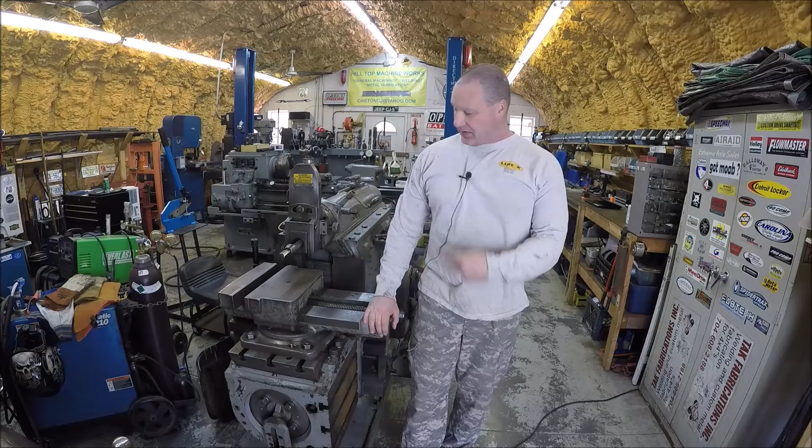Well hey guys, it's Tom here, and I got a new machine for the shop. I think I need to go to that 12-step program and admit that I've got a fetish for the old American iron.

So this was on my wish list, and I finally found one, and I couldn't pass it up. So time to make a video for you guys to enjoy the fruits of my labor. I filmed a short video of picking it up and unloading it and getting it set, so I'll go ahead and splice this in right after I do this intro.

So what you're looking at is a 16-inch G&E industrial shaper. Perfect size. I didn't want something too big, taking up a large section of real estate in the shop, but I also wanted something big enough that it'd have enough ass to actually do some decent work. So that's why I settled on a 16-inch shaper.

The 16 inches designates that the ram will travel 16 inches in stroke. The table should go down far enough so you've got 16 inches between the tool post and your work, and also the table should travel back and forth 16 inches. So basically you could cut a 16 by 16 by 16 cube.

And this is the industrial model. It's about 1,000 pounds heavier than the tool room model. The industrial model also comes with the front table support, if you can see that. If not, I'm going to do the walk around here in a little bit and I'll point that out.

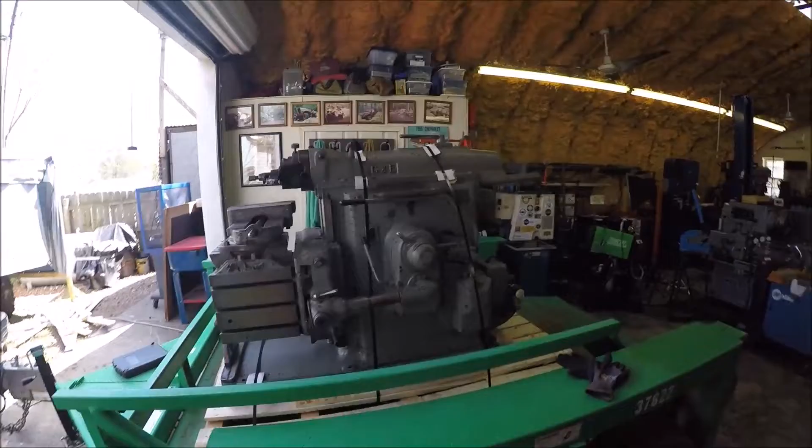Well guys, we got her home all safe and sound. Just got the crate off of her. Just kind of taking a look-see. Hopefully the light's pretty good here.

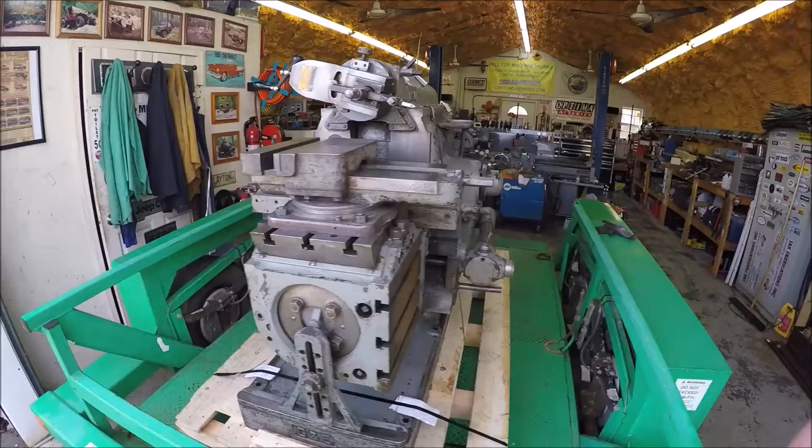But she is a 16-inch G&E Industrial Universal with the rotating table and also the tilting top that I was looking for. Comes with the front support. Of course, we'll do a more thorough look once we get her off there, but I figured I'd give you a quick shot. So there she is.

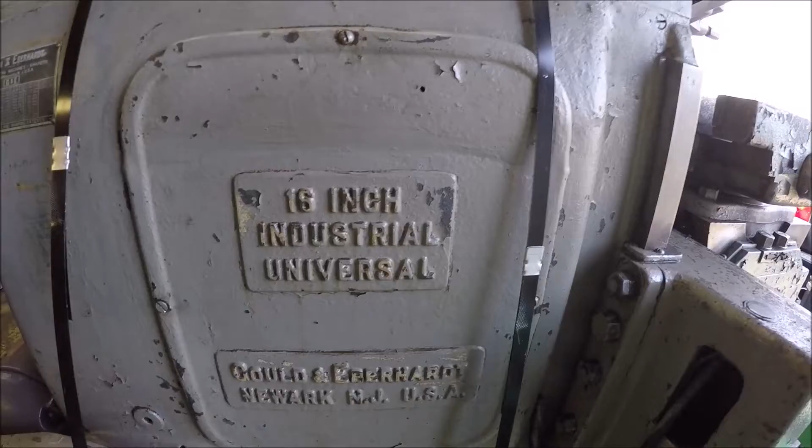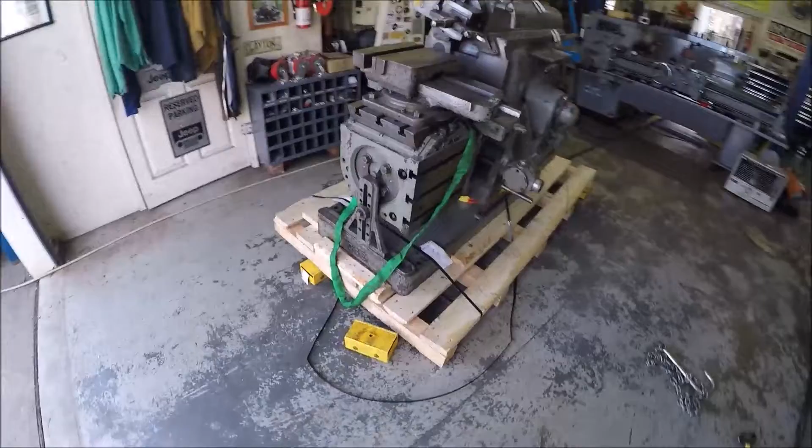So now we gotta muscle her off the trailer. Well, we just got her off the trailer. The skates work perfectly. We had to run a chain all the way back. I've got a 4x6 post in the ground, set up exactly for this, for pulling and winching. So the skates work good. Rolled her off the trailer slow and easy. Lost the skate at the last minute, but she's sitting on the ground, so yay.

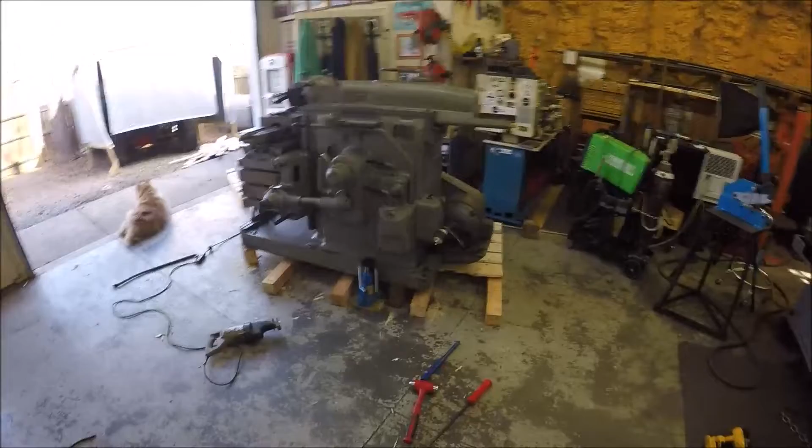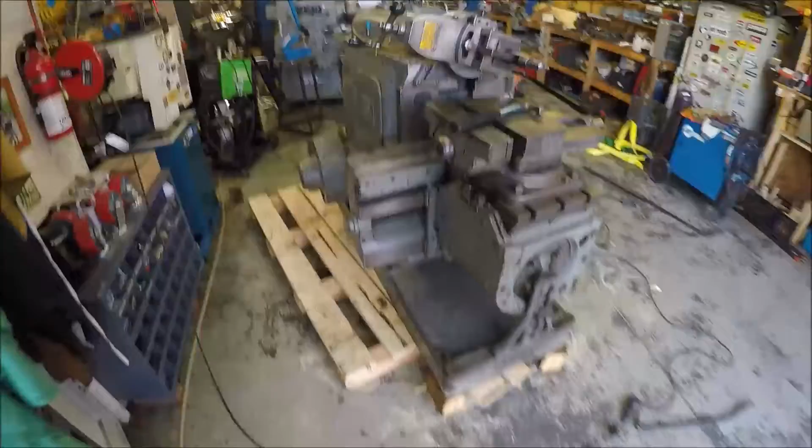Well, give you guys an update here. We are slowly getting the pallet out from under the shaper. As you can see, we're working our way and chunking it out. Slow but surely, being real careful.

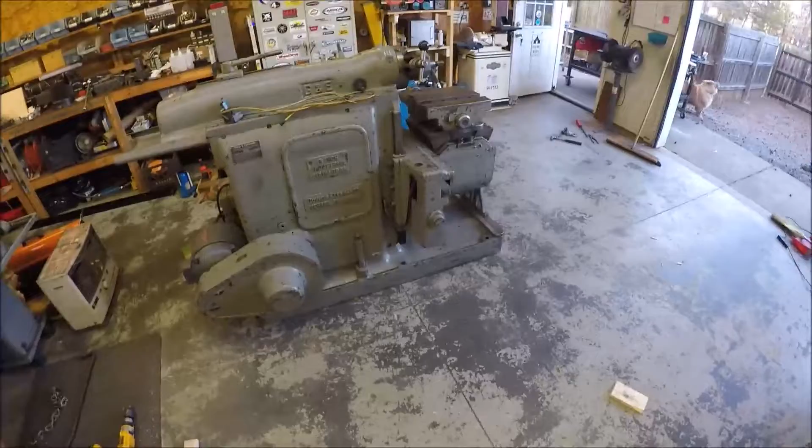Well, there you go guys. After a long battle, we finally got her sitting down on the concrete, and this is the position she's going to live. And I don't know why my dog wants to bark as soon as I do video. But no mishaps, no boo-boos, no Mr. Murphy showing up, so we are pleased.

And just a short walk around. I'll do a complete video on this here coming up once I get it cleaned up and wired and learn the controls and whatnot. There's a little monster making all the noise.

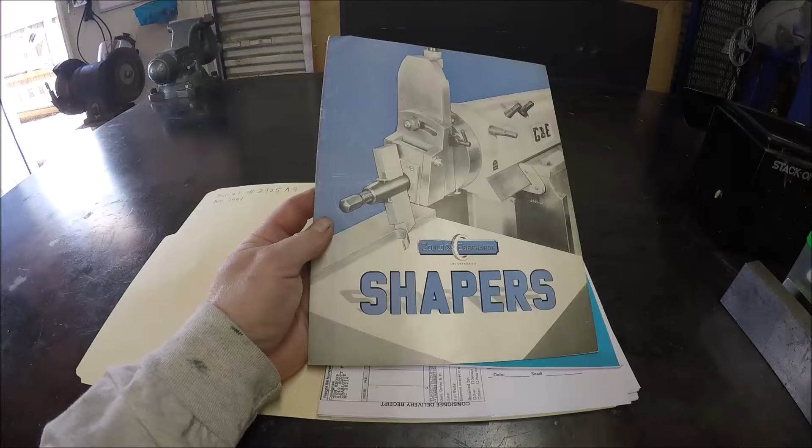I've been on the internet gathering and searching all the info and the manuals and whatnot I could find on G&E Shapers. So I picked up this original pamphlet that G&E put out. Figured we'd go through it real quick. It's kind of cool, it's from the 50s, but it kind of explains some stuff.

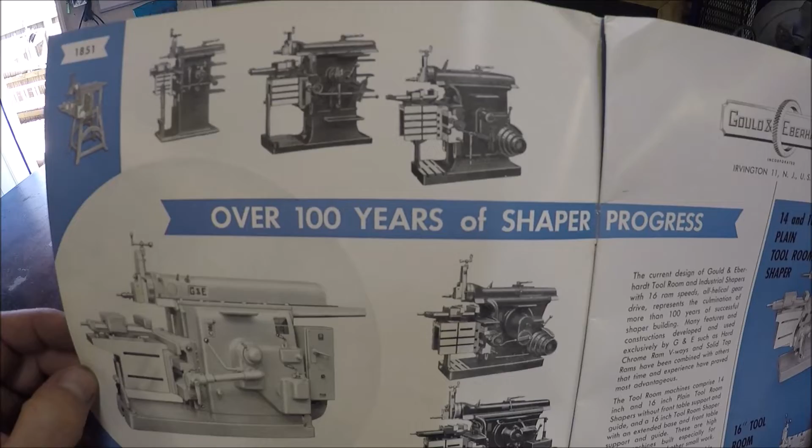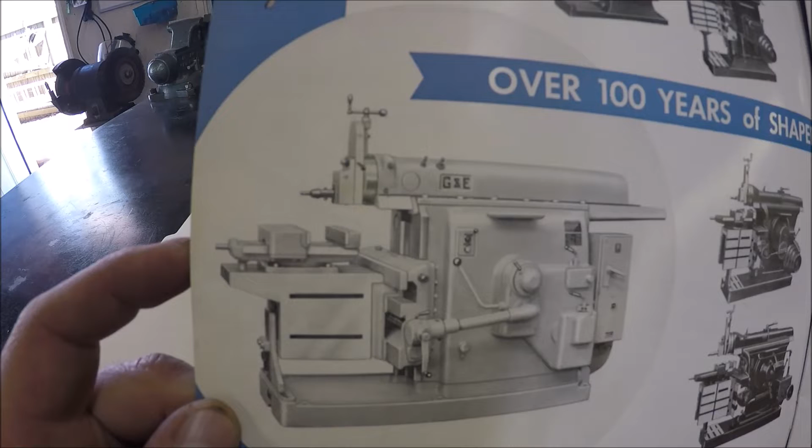And you guys can see how they started back in the day, 1851, and how they progressed to basically that was their latest version that they produced till they went out of business.

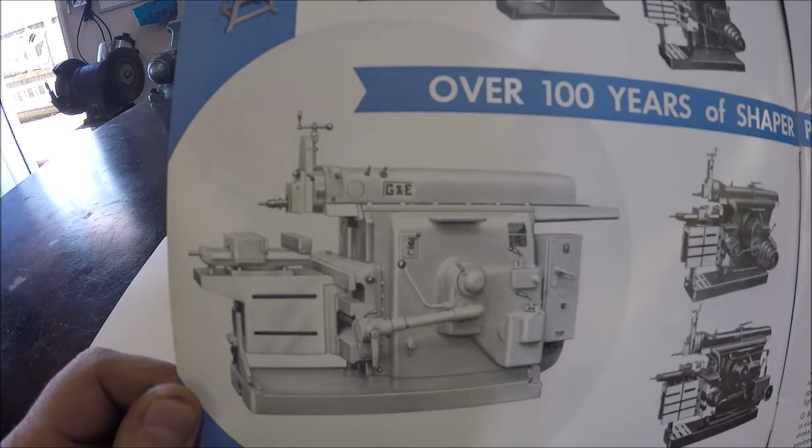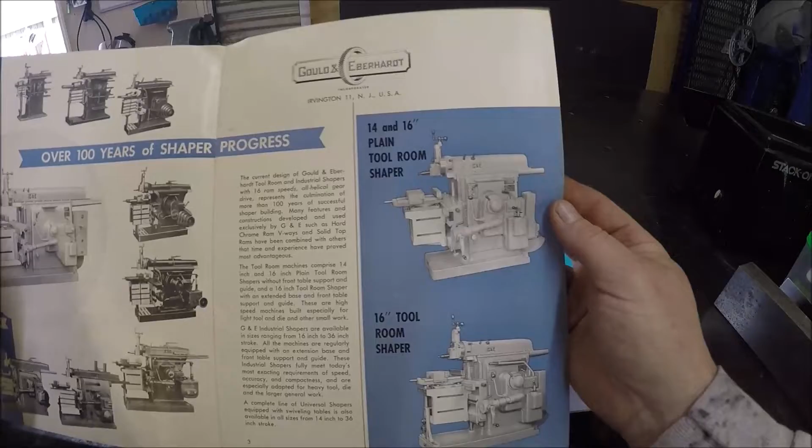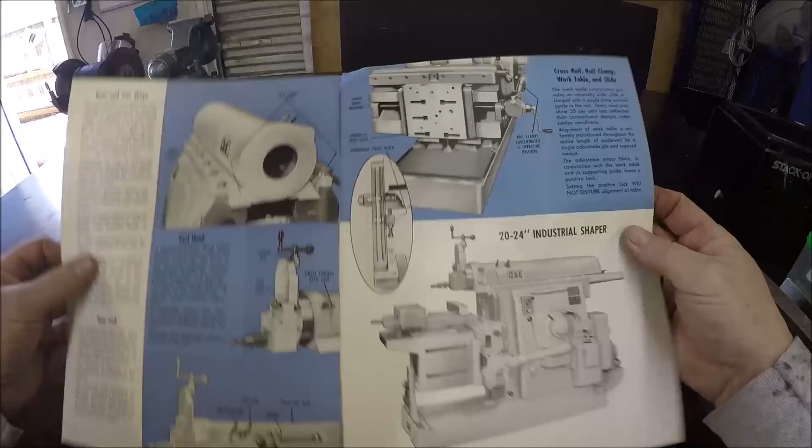And this will kind of give you an idea what the difference is of the tool room shapers. They've got a plain tool room, a regular tool room, and then they've got the bigger ones, the industrial type, which are a little heavier. The horsepower is usually a little bit more.

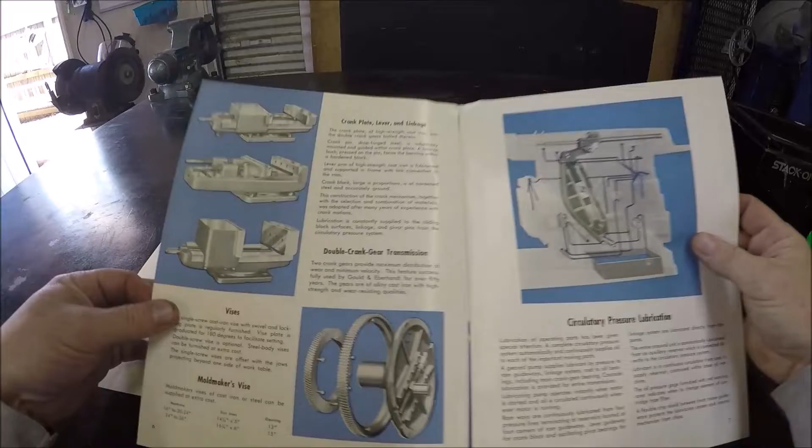And of course they come with big old vises. That's mine there. 14¼ inch jaws - that's a big one.

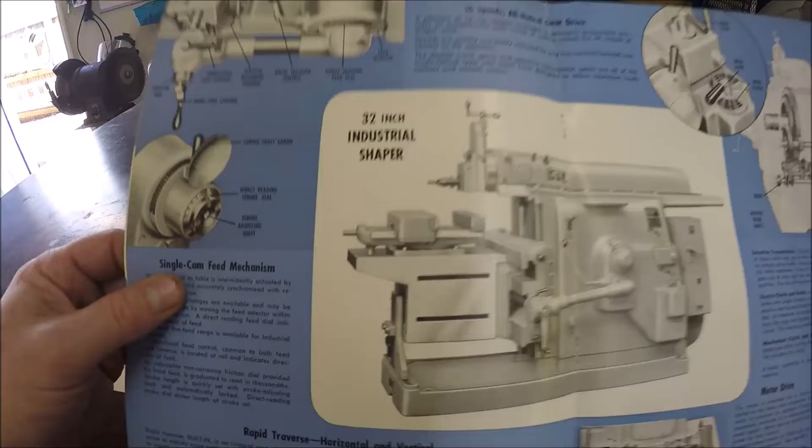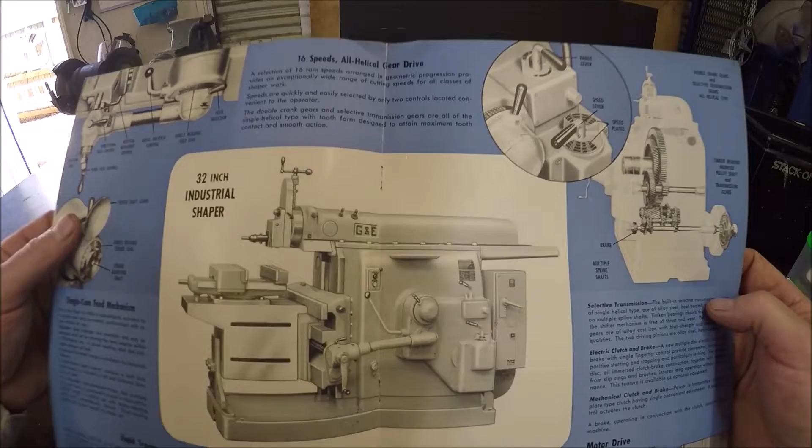And that's what Adam Booth looks like. He's got the 32-incher industrial, except he has the universal table on his. And his is a 16-speed transmission, so his is later. Mine is actually an 8-speed transmission, and I found the manual for that, so that was good.

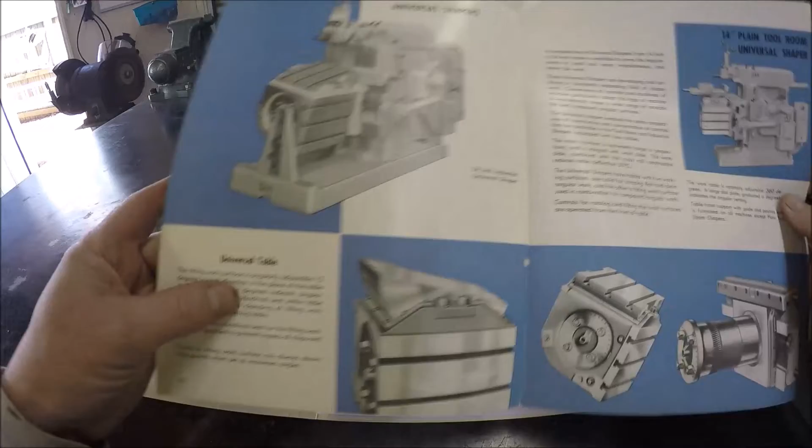Let's see what else. So here's the universal table they talk about. It rotates and tilts, so you can do a lot of intricate stuff on it. Instead of just having a flat surface, you've got to try to work with using angle blocks and angle plates and whatnot, trying to clamp your work and get it at an angle. You can just move the table around.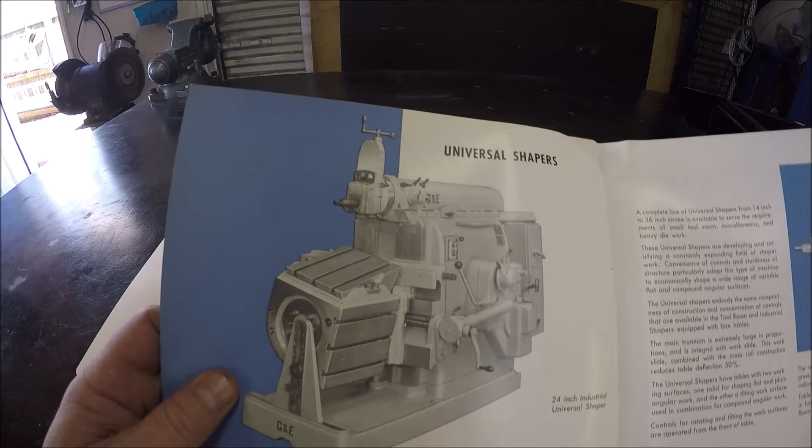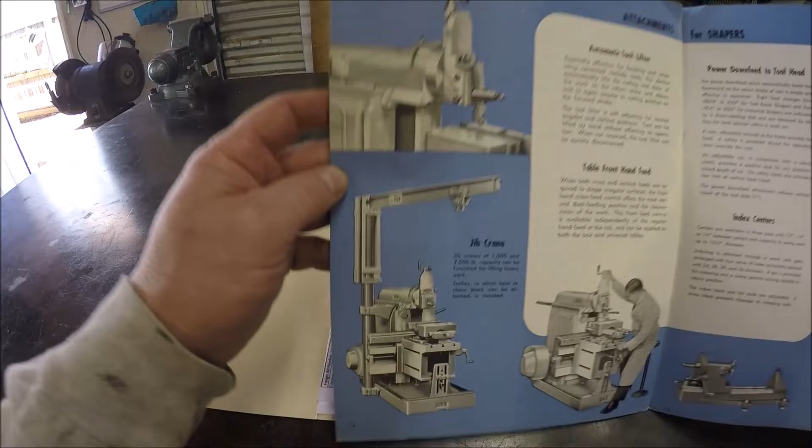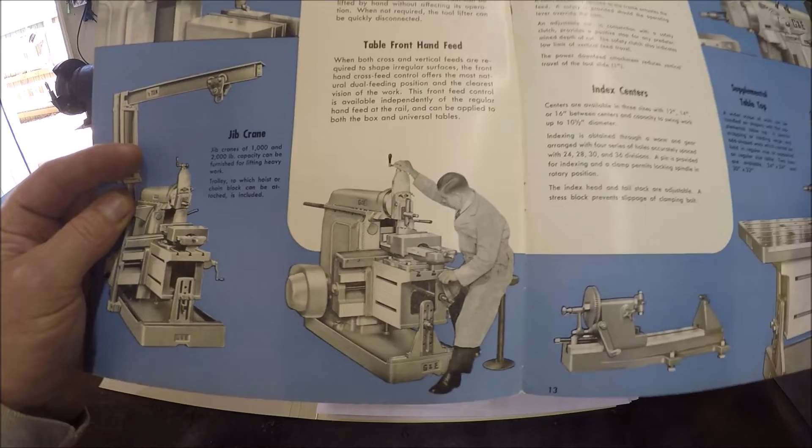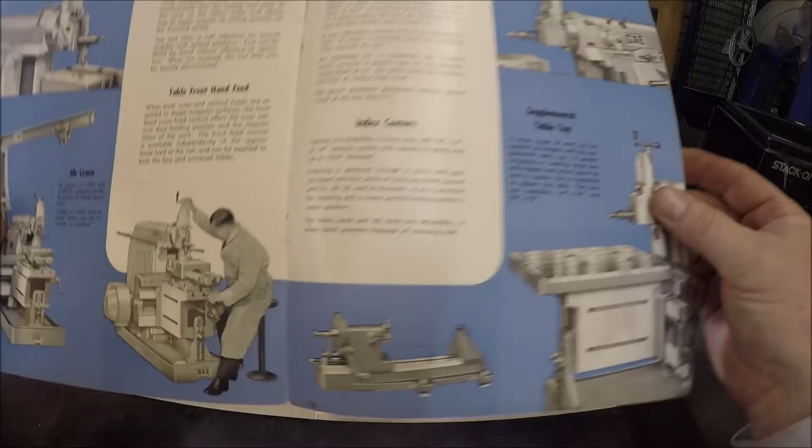And here's all the extra accessories. They did make an automatic tool lifter for it, kind of cool - I've never seen one with a jib crane. But you can see they came with brackets there, and there's a front feed, so you can sit there and work and raise and lower the table and do different shapes. And a couple other accessories, indexing centers, and a supplemental tabletop to enlarge your work surface area.

And then the back, it just talks about specs. So pretty cool. So let's go do a walk around. What do you guys say?

Okay guys, gonna go handheld, so it may be a bit shaky, but I'll do the best I can. And here is the front table support that I mentioned.

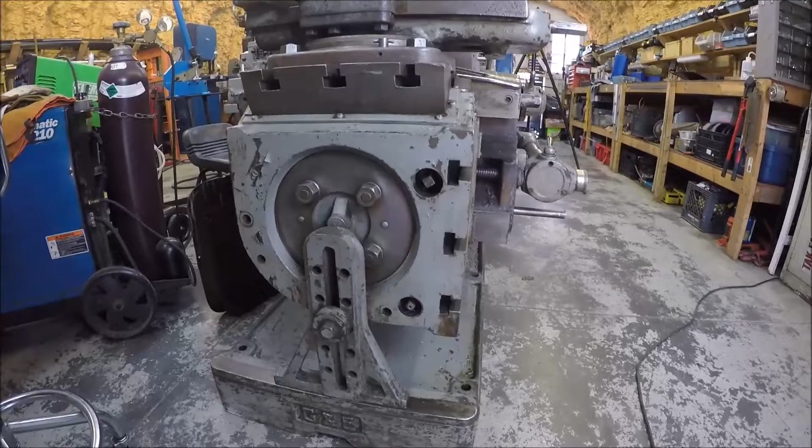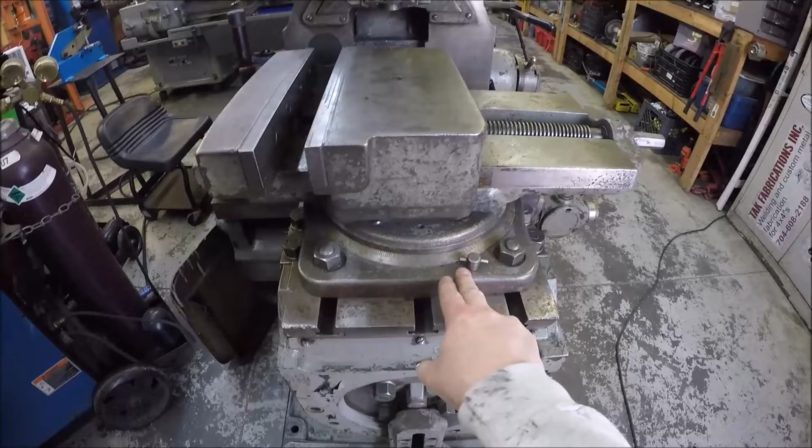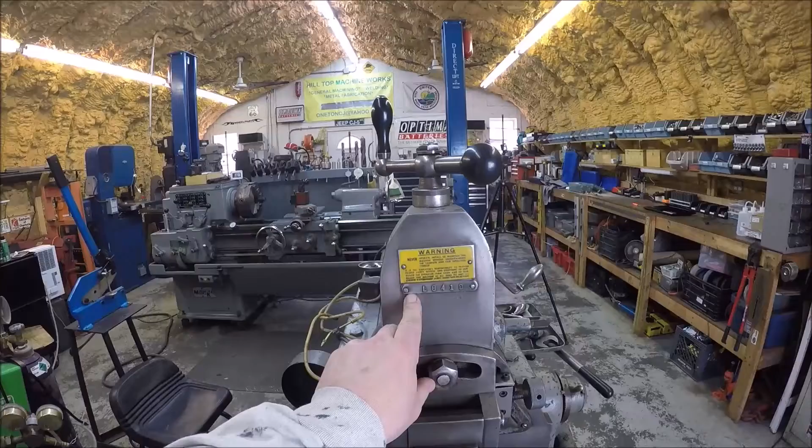And of course the vise has a base that'll rotate all the way around. And kind of cool, this is the tag that one of the companies that this machine was sitting in - that was probably their inventory tag. And of course their warning label here.

In other words, don't be an idiot if you're going to operate this thing, because it'll probably hurt you or kill you, which is probably a good thing to know.

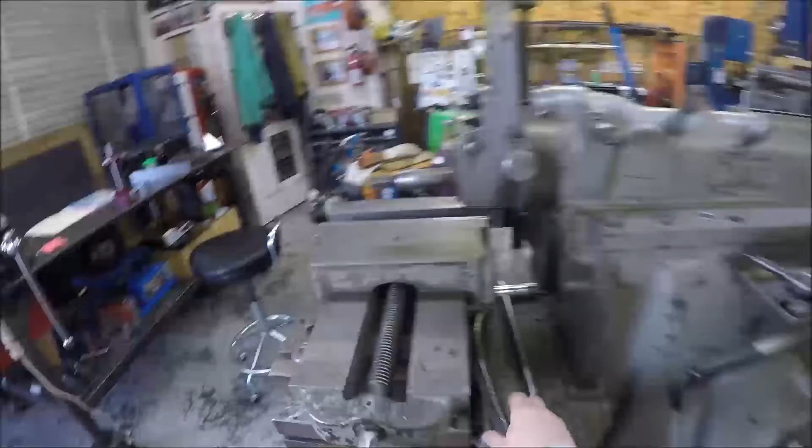Did come with the original vise wrench, but I mean, how do you do that, really, guys? I mean, holy cow! I don't think that is factory bent. It wouldn't make sense to bend it like that.

And then also, I don't know, let me see if I can get down real close. You can see the taper, so you can see the wear. So this thing is actually seeing a lot of use sliding on and sliding off.

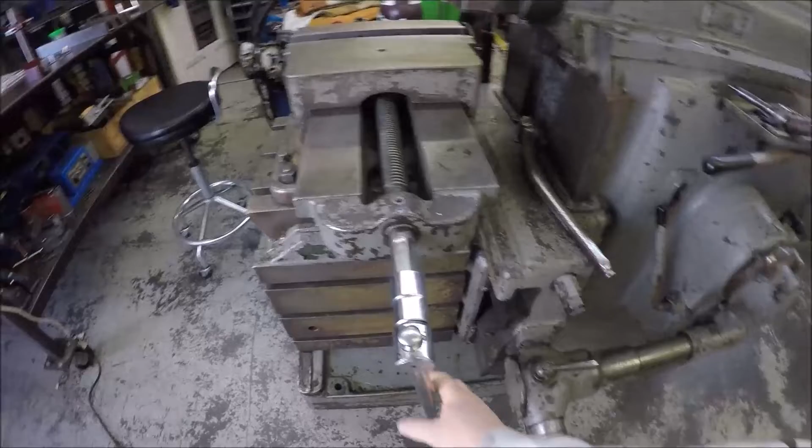It's pretty sloppy. So I dug around in my spare stuff, and I got a 3/4, 5/16. So I'll probably use this most of the time, since there's so much slop inside that hex.

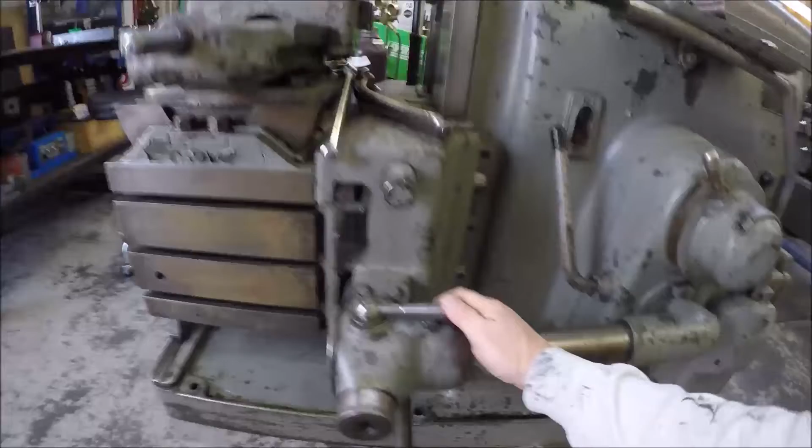Let's see, it does have power traverse for the table sliding back and forth this way. It does not have it to raise and lower it.

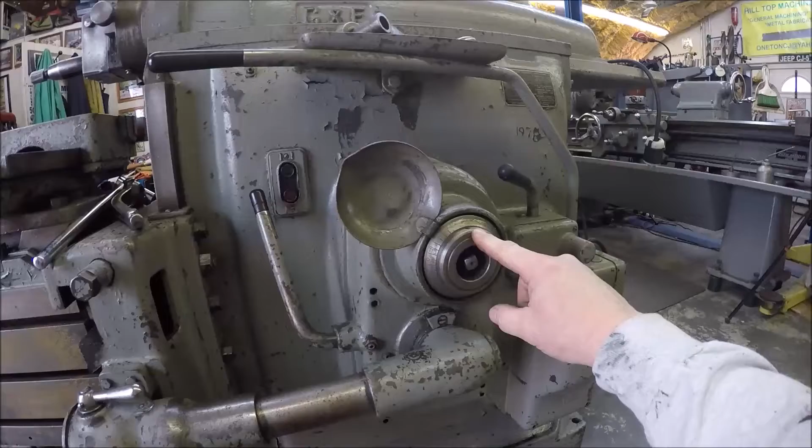Let's see, that's how you adjust the stroke length, and of course this is where you adjust your step over. And this is the 8-speed transmission, so you've got a high and low, so you've got 4 in low and 4 in high.

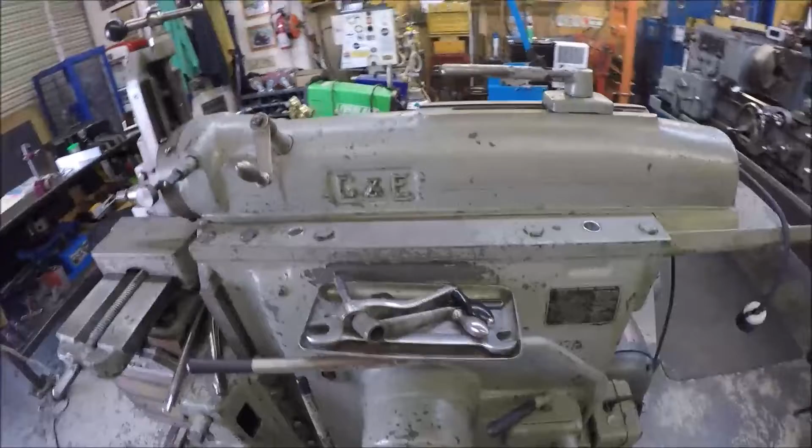Did come with all the wrenches, so that was nice. Bad thing is, if you can see that, the sight glasses are trash and have seen better days, so I'm going to have to make some new sight glasses

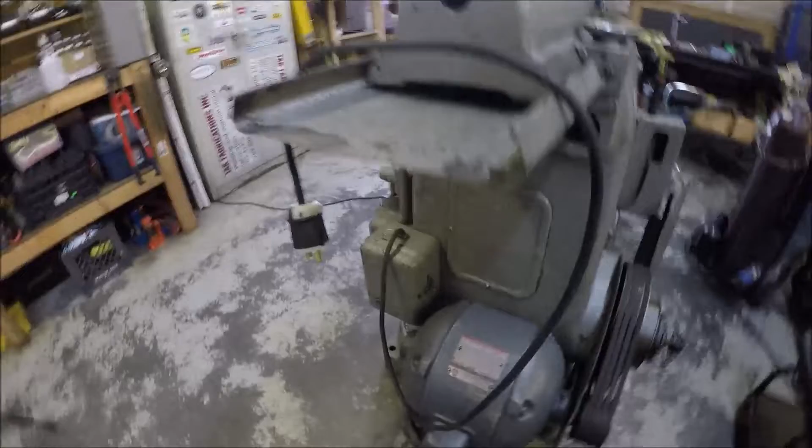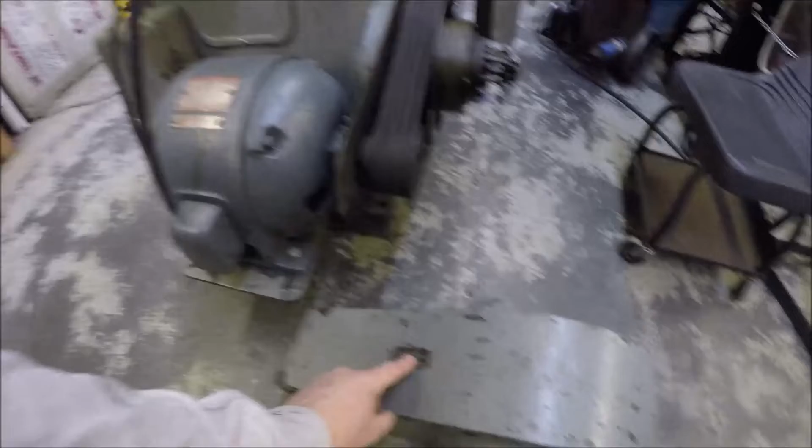and do a walk around. I already took the box off, and looking at the tag, confirmed it is set for low voltage, so we're good there. I got the belt cover off because somebody removed the directional tag.

I've been on Practical Machinist and also Hobby Machinist, asking other guys what rotation and what direction these belts are supposed to rotate, and everybody seems to say clockwise. I did find a manual, and it actually says it's supposed to rotate counterclockwise, so not 100% sure. We're gonna have to fire it up, I guess, because if it's rotating the wrong direction, one, the oil pump won't work, and two, obviously the ram will be moving faster outward stroke than coming back. So we'll figure that out.

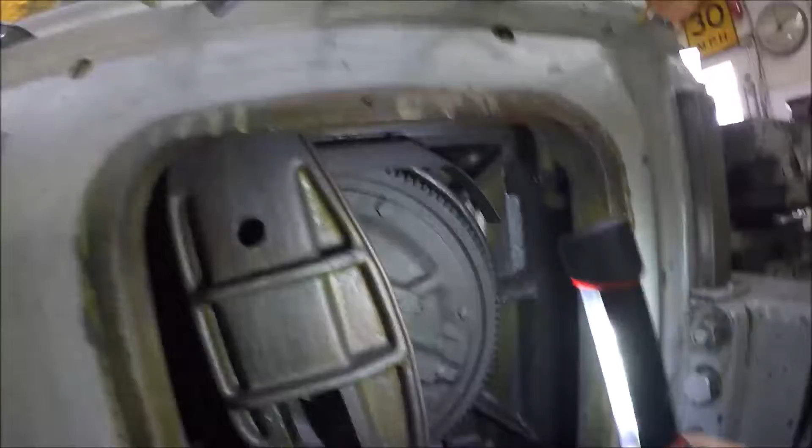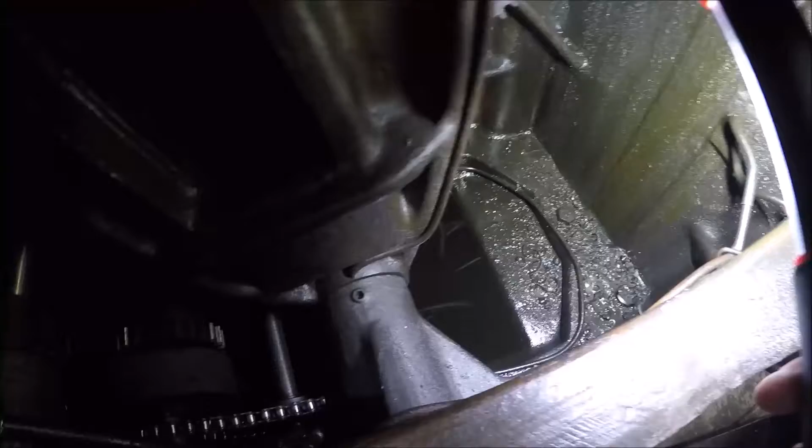Let's see, let's take a look inside. Let me get you guys some light. Looks good inside, the gears all look good. Does have oil in it, which is nice. Don't know how old, or don't even know if it's the right kind. Hopefully you can see that. Bunch of chips, so we'll do a clean out, get this thing cleaned out.

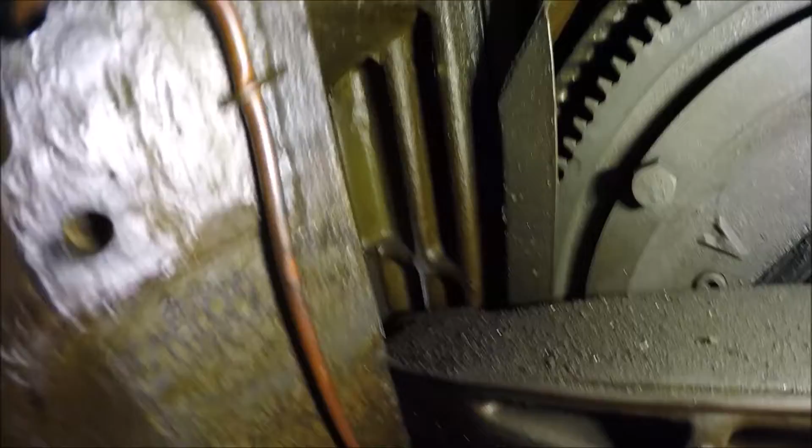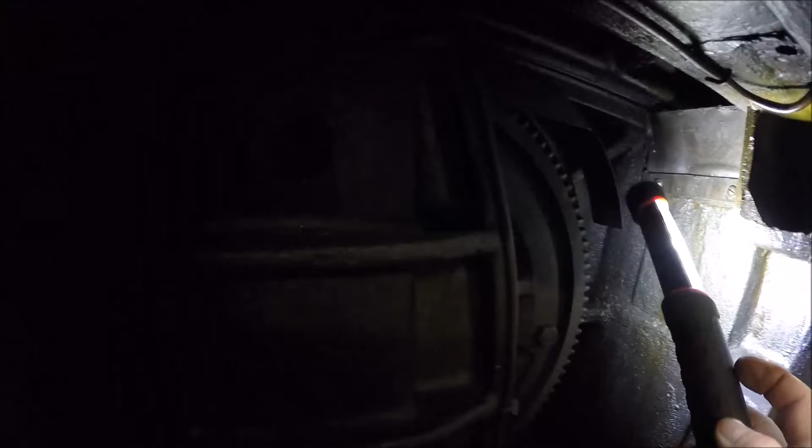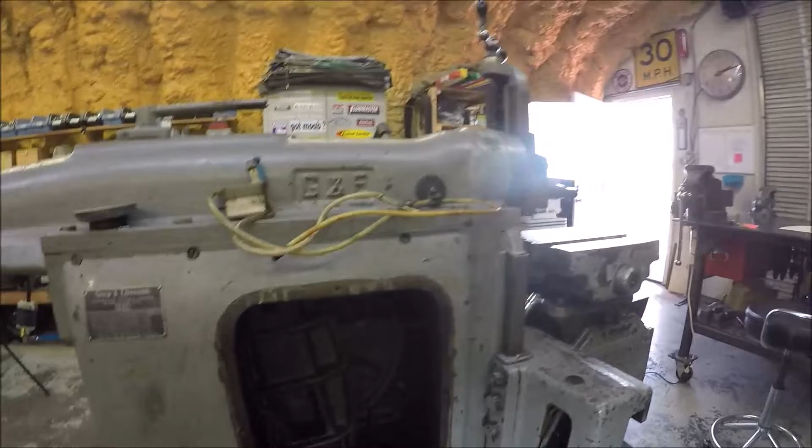But overall, I am pleased with what I got, because I couldn't run it, I had to buy this thing, like it was. It ended up getting it from a machinery dealer up in New Jersey, and I had to pay to have it shipped down here. But they had a decent reputation, so I had my fingers crossed that I got something good. It doesn't have problems. So that's what we got to work with.

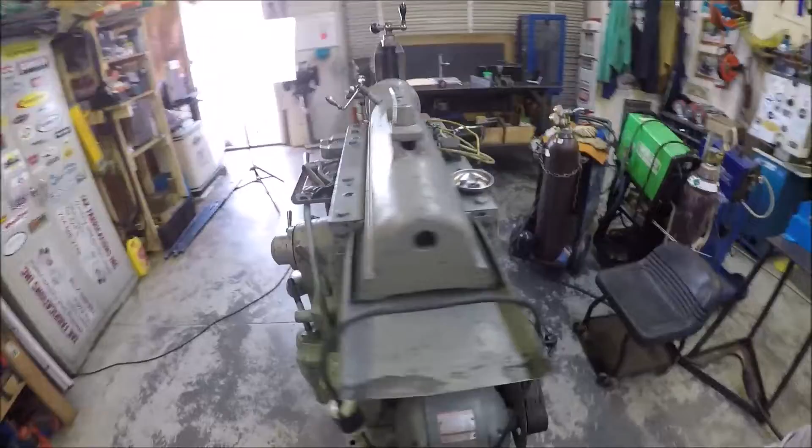We'll have videos as I get this thing cleaned up and as I get it up and running and making its first chips. So I hope you guys appreciate the short little video here, and leave some comments. And with that, I'll talk to you guys later.